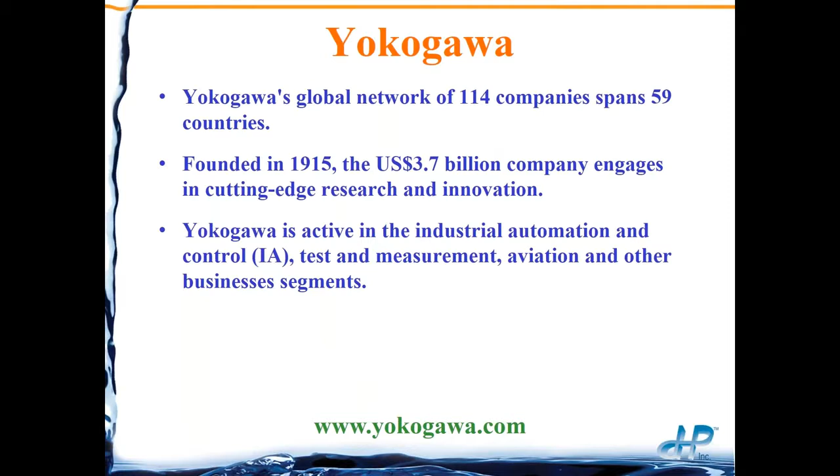Most of you know about Yokogawa, a huge company all over the world, does many more things than you and I probably know about. We may know more about the instruments, but they have all kinds of different business segments, basically in just about every industry that you can name.

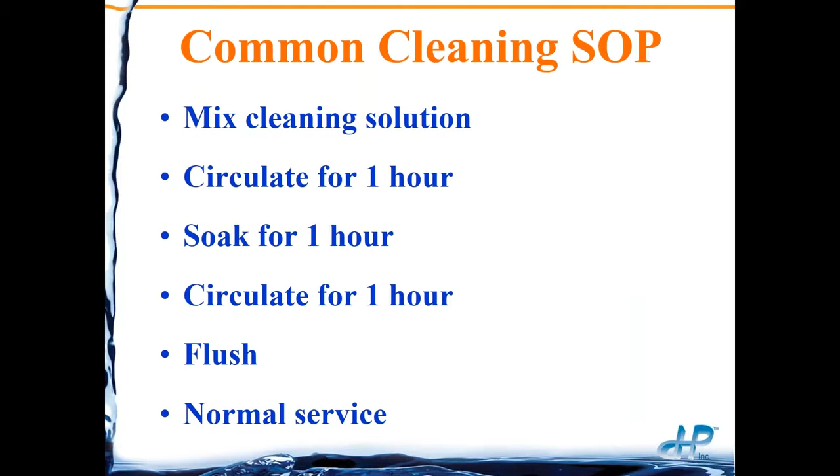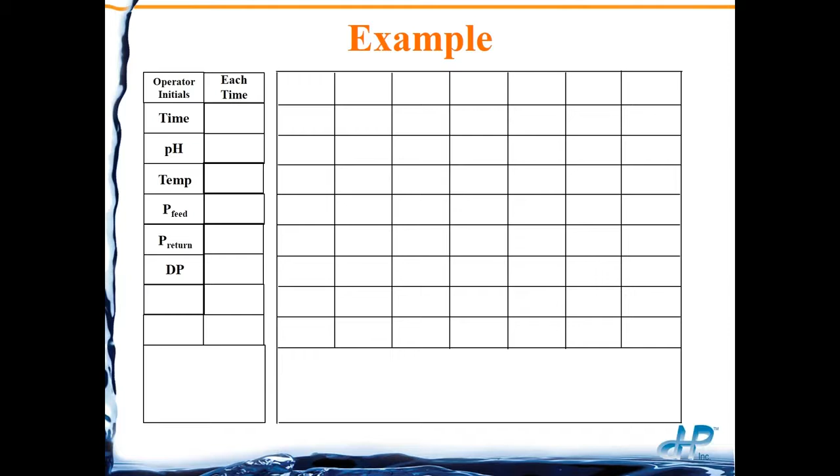So that's a cleaning. Some of you do, some of you don't, but we recommend that you monitor the cleanings. There are certain things that are very important to monitor—we won't get into the details of that. There's also a column that shows the guardrails: don't go below this or above this pressure or temperature.

We recommend every 15 to 30 minutes you're taking data and making notes as needed. That way you can really monitor and see what's going on.

So let's say that we did this cleaning and we're tracking normalized permeate flow, which we should be. We cleaned when the normalized permeate flow dropped 10 to 15%, but after the cleaning we only gained back about 50%. We didn't go back to new or near new performance. So why? Well, we could do some troubleshooting.

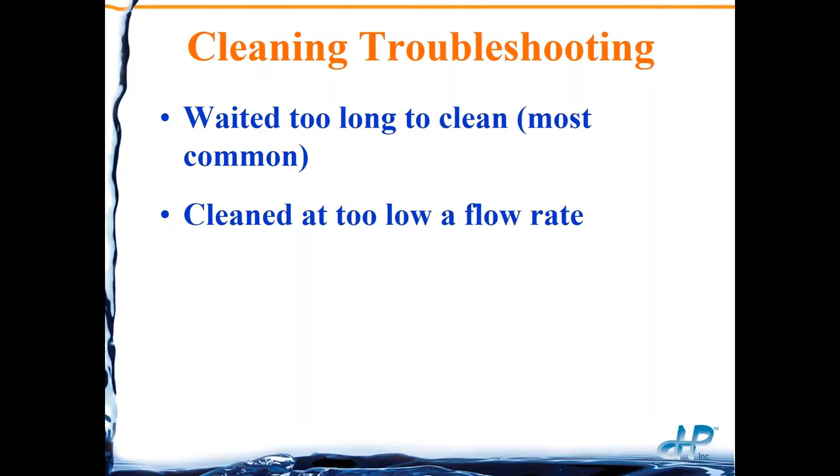Some things that can happen: we waited too long to clean—we won't talk any more about that, we're only going to talk about pH at this point—cleaned at too low a flow rate, too low a temperature, didn't clean long enough, didn't replenish cleaning chemical, and that's really what we're talking about here.

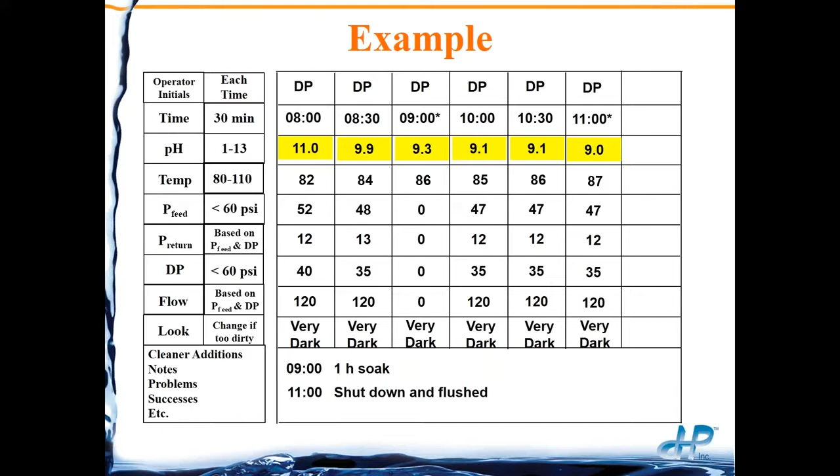So if we look at the data for this cleaning, we started out at a pH of 11, and by the end of the cleaning, 3 hours later, we're at a pH of 9, and we didn't add any chemical to it. So remember from 2 webinars ago that pH is logarithmic.

So if we started out with a pH of 11, we'd call that our new solution, our 100% strength. What's the strength of the cleaning solution when we hit a pH of 10? Well, again, it's logarithmic, so we only have 10% of our cleaning solution left. And if we wait until it hits a pH of 9, what strength do we have? Only 1%. So this is an example of using pH for troubleshooting.

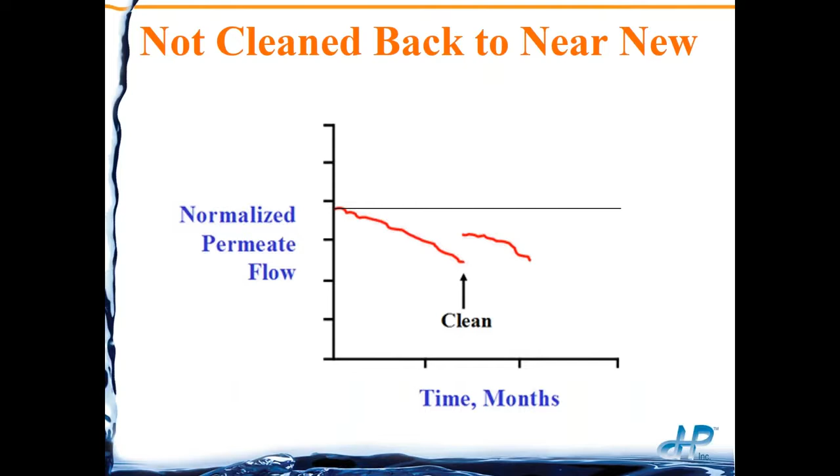We should have added more cleaner. And that might be the reason, or at least one of the reasons, why we didn't clean this back to new performance. And then finally, just a quick one on ORP troubleshooting.

ORP measures whether a water stream is reducing or oxidizing. The last webinar that we gave a couple weeks ago will give you a good basic understanding of ORP if you didn't get to see that.

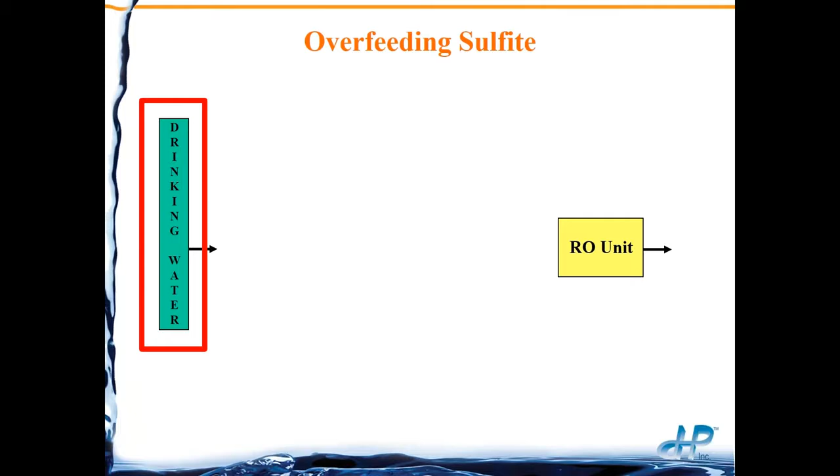Well, one problem that's fairly common is that many industrial RO units operate on drinking water, and drinking water is chlorinated. Polyamide thin film composite membranes can't take chlorine, so we either use activated carbon, ultraviolet irradiation, or sulfite injection in order to remove the chlorine before it goes to the RO unit.

If you're using sulfite, that's where an on-stream ORP meter makes sense. You can have a feedback loop that tells your sulfite injection pump how much to pump, and you can also have an alarm and a shutdown feature so that if the ORP goes too high, you can shut down the RO unit.

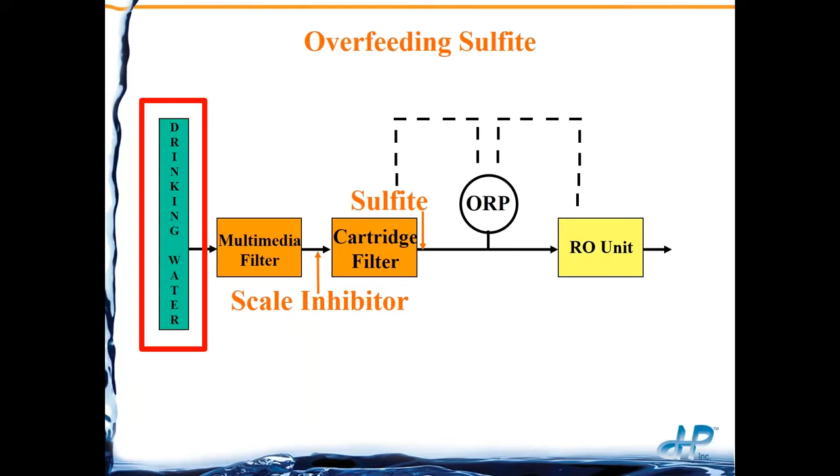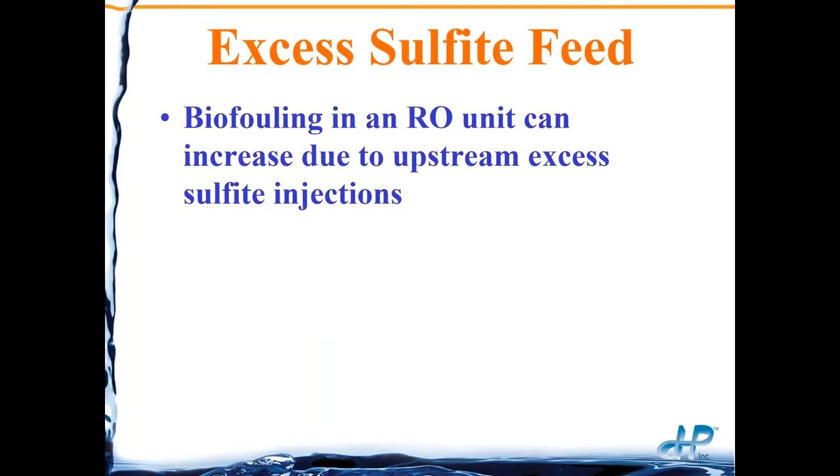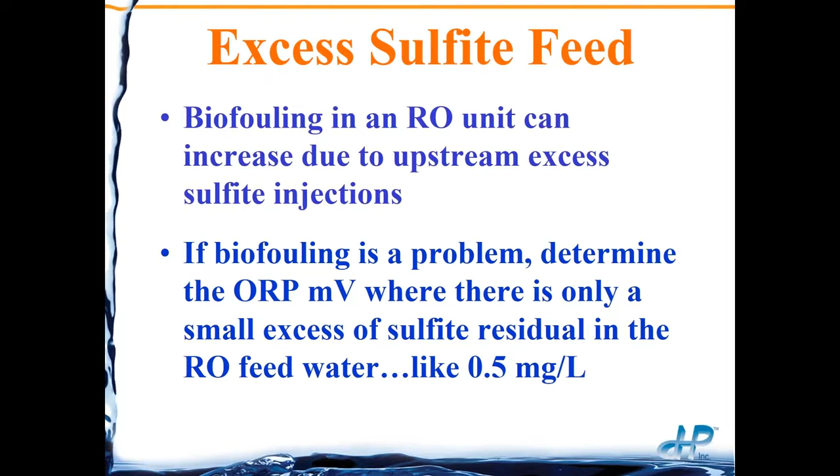Well, if you overfeed sulfite, you can end up with increased biofouling in the RO unit. So we really want to minimize the amount of sulfite that's injected. If you can get an excess of maybe just 0.5 milligram per liter, no more than 1 milligram per liter, that's probably going to minimize the biofouling in the RO unit.

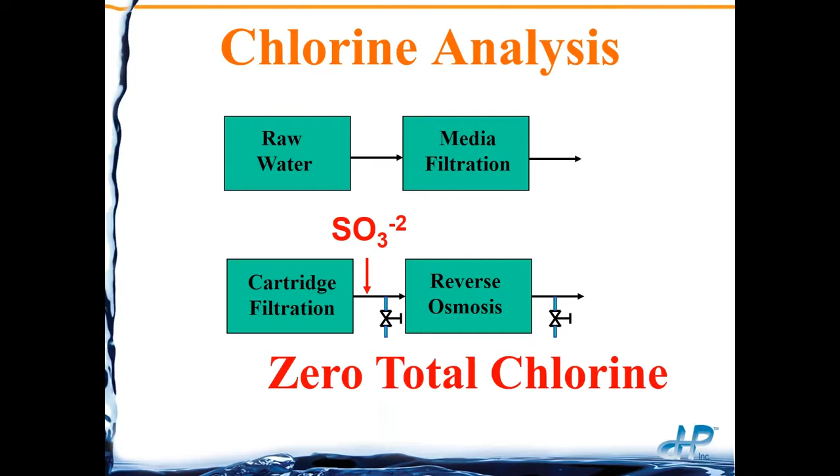So again, as far as using ORP as a troubleshooting tool, we want to make sure that the sulfite injected gives us a 0 total chlorine, but we also want a minimal sulfite overfeed. All right, so that's an introduction.

Now let's move on to the bulk of the presentation and turn this over to Cherlyn.

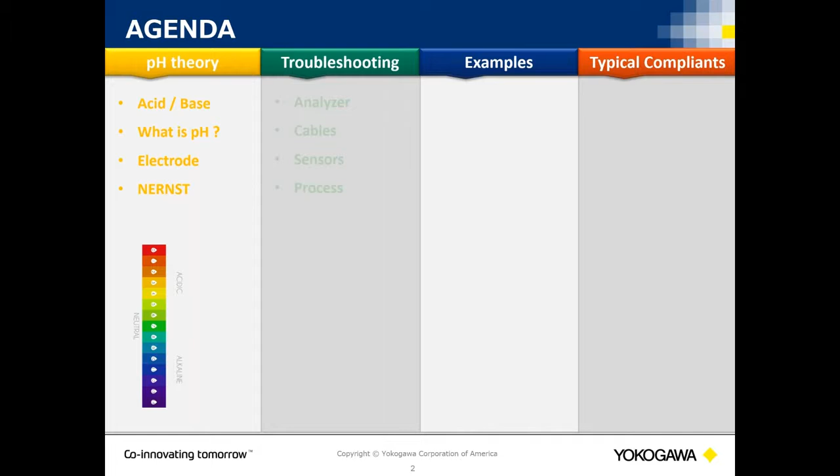Then the bulk of what we're going to cover is when we go to a site location, or I'm on the phone with you and you call and say your stuff's not working, you're seeing inaccurate readings, what's going on -- these are the steps that I'm going to do with you or at the site location. So our best practice of what to walk through.

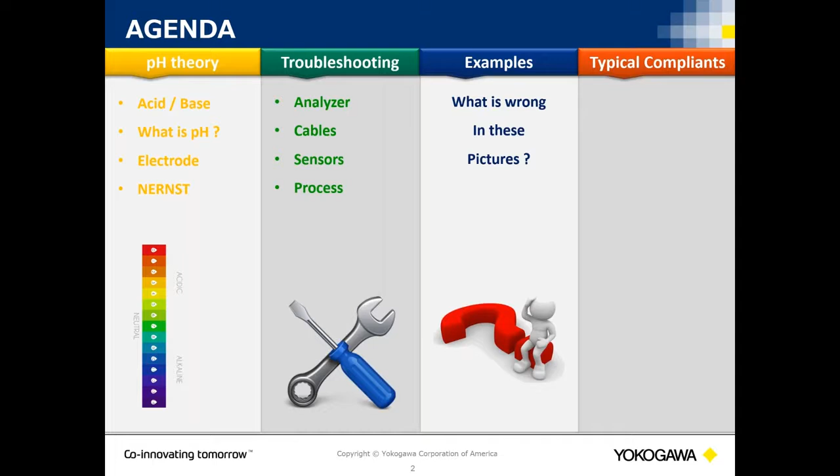And then some real life pictures that I've seen with installations and what could be wrong, just to bring light to some things that you may see out in the field with yourself already. And then go over some typical complaints or commons, or what could be causing them, okay? So that's the bulk of what we're going to do.

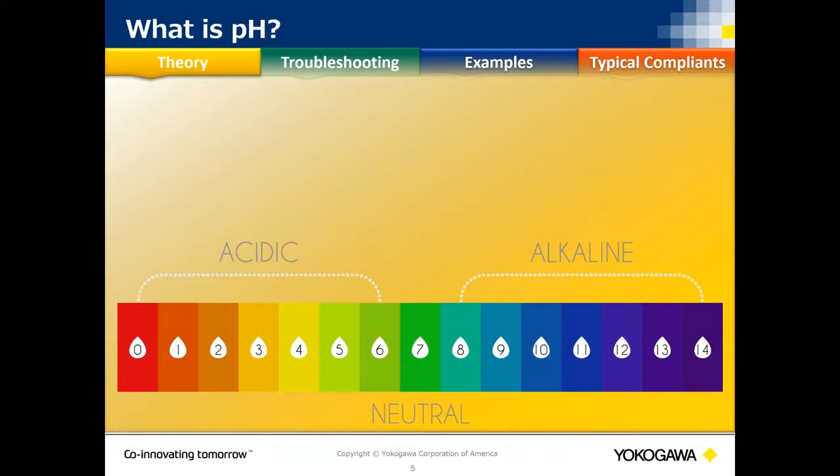Theory. All I want you to get out of this is we have the pH scale. We know it goes from 0 to 14. 7 is the neutral point, which means it's 0 millivolts. Anything below that is acidic, anything above is alkaline. The biggest thing we talked about and highlighted is the effect of temperature.

Remember, temperature is important to your pH readings for two reasons. There are two different types of temperature compensation. There's the effect on the glass electrode, where as temperature increases, that glass will expand and contract, which shortens the life of your system. But there's also one called a process temperature coefficient, meaning outside of the glass changing, the pH of the sample actually changes with temperature.

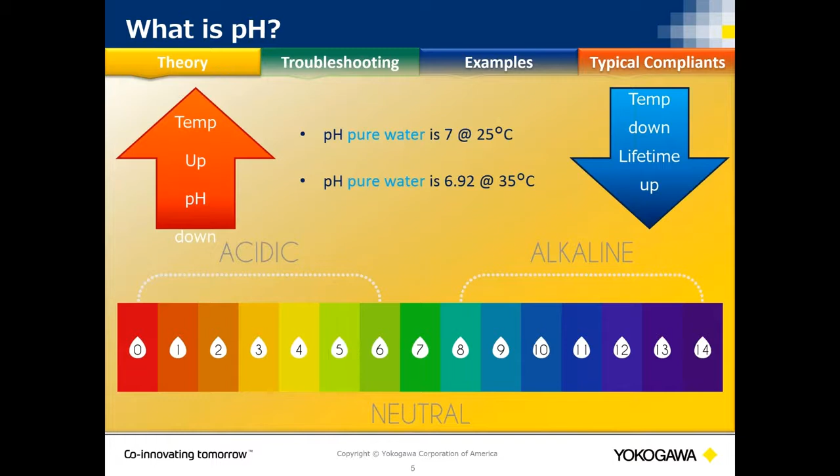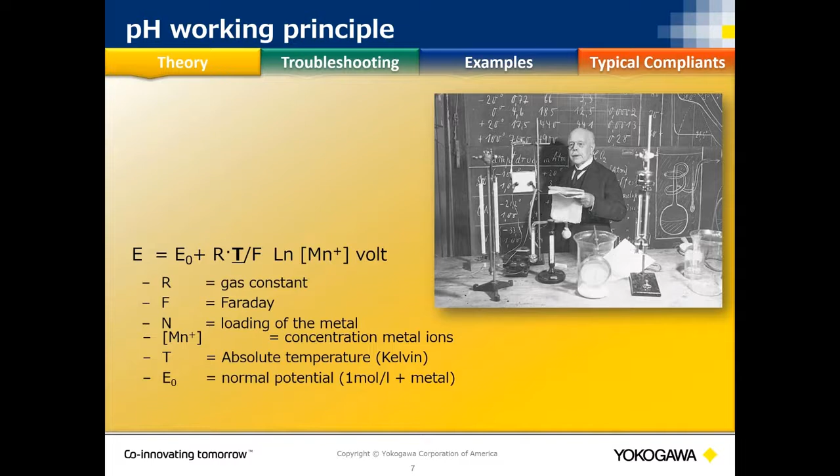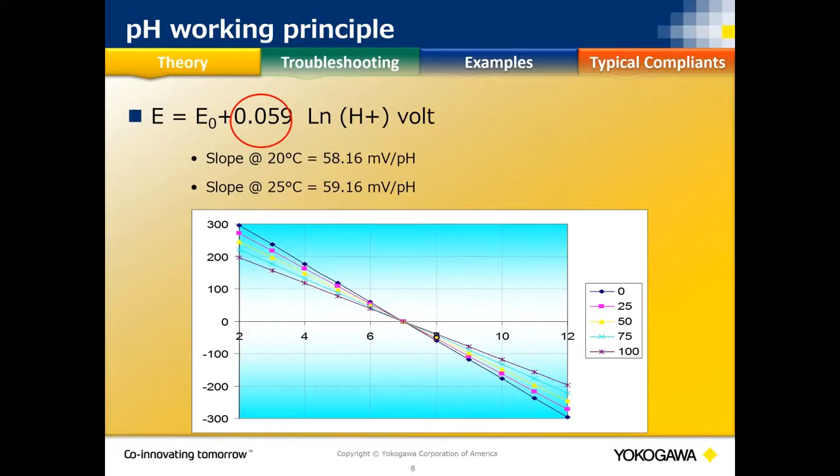The reason we need to pay attention to temperature is because the Nernst equation has temperature right in it. So any effect of temperature is largely impacting your actual pH measurement, okay? Out of this Nernst equation, the magic number we want you to get, this 59.16 millivolts, is what we want to stick in your head. At 25 degrees C, 59.16 millivolts is equivalent to one full pH shift. This is important because when we look at calibration data in the analyzer, we're correlating that value with what our instrument is offsetting or compensating back for. That's all we want you to get out of that theory.

So the other thing about temperature, remember I mentioned Nernst compensation. A perfect slope pH glass electrode responds so that one pH change is equivalent to 59.16 millivolts. Because of the way the glass is made, it actually will change with temperature. So the Nernst, or automatic temperature compensation, also called Nernst compensation, changes and accounts for this. At higher or lower temperatures, that 59.16 millivolts is slightly different, okay. That's what we just want you to remember out of the theory of pH.

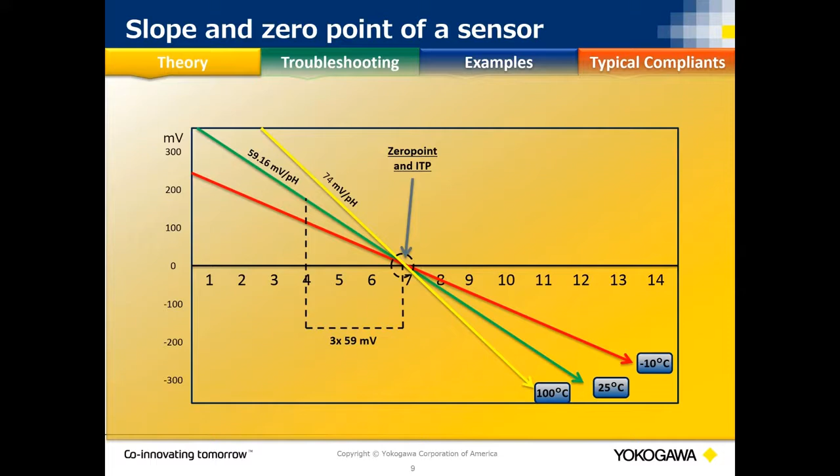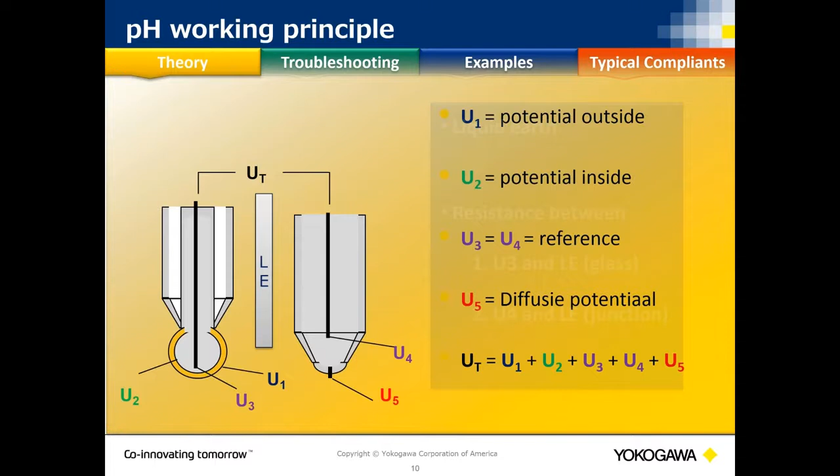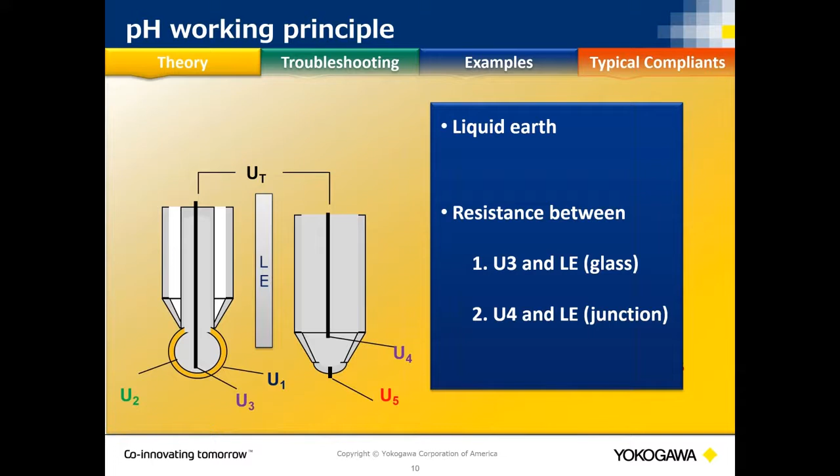You insert a solution ground electrode into your probe. That's what its purpose is. Then you can isolate and know, is what's going on affecting my glass for my process, or is it affecting my reference electrode? So that's one of the purposes of the solution ground rod, to differentiate where I'm having problems, or which side of my probe my process is actually affecting.

One thing I hate about most, to be honest, about pH is ground loop. Has anybody ever experienced ground loop problems in their plant? If we don't make sure that the analyzer, the pipe, and the probe are all on the same liquid earth ground, the whole grounding, noise will travel up through our probe, into the reference electrode, and into the analyzer. It will shorten the life of our probe and cause noisy and inaccurate readings.

So we need to make sure, and that's the other purpose of that solution ground rod, that your sensors are on the same ground as your analyzer. We just need to make sure that our analyzer and that entire loop are on the same grounding as our process pipe. This, I think, is one of the biggest headaches to solve, especially if you're in Florida, where I see it most commonly—ground loop currents. That's the biggest headache with that aspect of it.

And that's, from my knowledge and understanding, really the stopping point of where we go. You can simulate this in your analyzer on the terminal strip. There's going to be a solution ground terminal and a reference terminal. If you use a paper clip or a wire to jumper those two together, and your reading locks on and is no longer noisy, that's a good indication that you have improper grounding in your entire system. So that's one little test you can run.

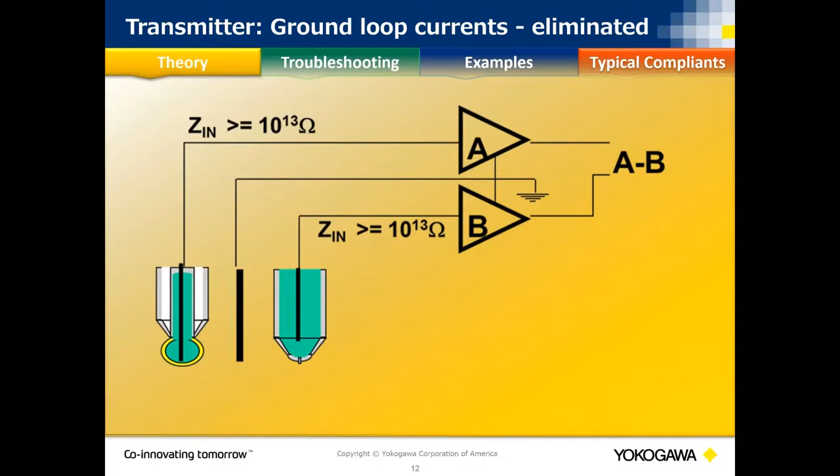Obviously, if you don't want to do that, you can easily just take a grab sample, take your sensor offline, and put it in a bucket. If your system goes stable, and then you put it back online and your pH or ORP measurement starts to drift again, that's another indication of grounding. So those are ways for you to figure out if grounding is causing errors in your pH reading.

So the bulk of where we're going to spend today: these are our steps on what we feel is the best process when you check your analyzer if you're having problems. The first thing we're going to do is check the data in the analyzer itself.

Remember, the photos that I have are just my instrument photos. For copyright issues, I can't use other people's equipment.

After I look at what's inside my analyzer when I walk up to it, I'm going to try and simulate on the analyzer a pH 7 and a pH 4. This way it tells me if my analyzer is working or if I need to migrate and look at the sensor as the problem.

And then if none of that works, I'm going to short these terminal numbers - your reference pin in your analyzer, your pH measuring glass in the analyzer, and your solution ground. All of those should lock in on a reading of 7. If they don't lock in on 7, if it's like 3, 4, whatever in your analyzer, then it's a good indication that your analyzer is actually what's causing your failures and what needs to be replaced.

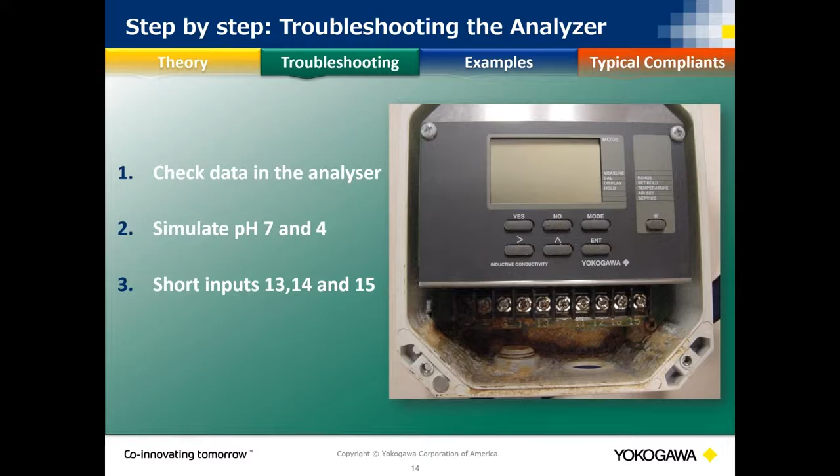So right now I'm going to go into a little bit more detail on these 3 components, okay? We've got some videos for you.

So first, when you arrive at an analyzer, I want you to take a look and see what you have. And when you call me, I'm going to ask you for some data - the last time you did a calibration, what was that zero offset or your asymmetry potential, or what are common terms?

What's that millivolt? When you did your 2-point calibration and stuck it in your 7 pH, how far off from 7 pH did your pH probe say it was? Remember, this example shows 11 millivolts.

That Nernst value is 59.16 millivolts, remember? So at 11, not so bad - it's about a quarter of a pH that we're compensating back in. But if we get to be about 30 to 35 millivolts, we're saying that instead of a pH of 7, my sensor is reading a 6.5 or a 7.5, depending on if it's a plus or a minus in that millivolt reading. So that's the purpose of that Nernst value of 59.16 in the theory that we want to take back to.

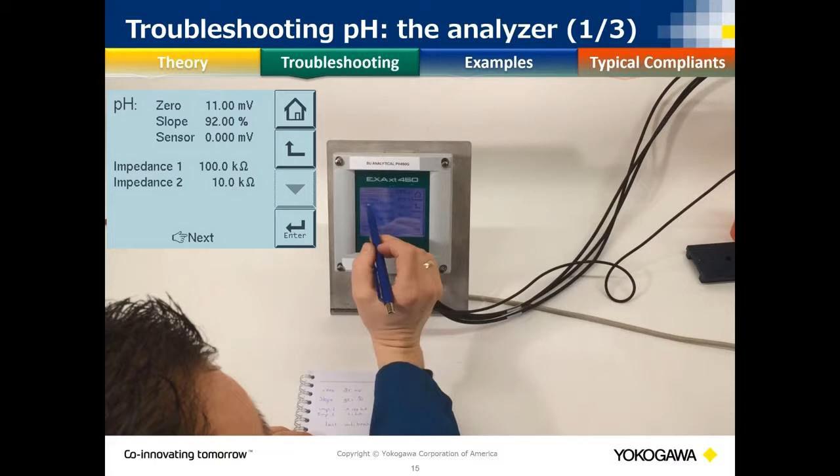Okay, the next value is going to be the slope. Some instruments give it in percentages - ours gives it in percentages. Others do give it in millivolts as well, but it's the same thing. That 59.16 is 100% slope. So this one is a 92% on this screenshot that we did here. That's pretty good, that's not bad.

But if we go below that, if it's about 85%, then we are going to look at saying, okay, well, I'm also having slow to read, so we need to look at - probably fouling on the glass electrode is probably causing the issues.

Two other values that you get in your instrument are what we call reference impedances, 1 and 2. One of these is our impedance on your glass electrode, one of them is the impedance on the reference electrode. So those values are not in everybody's analyzers, but we can read these values as well and figure out live time what's going on with the system.

Other information that I'm probably going to ask you for that are in analyzers today: when was the last time that it was calibrated previously - go 2, 3 back and show me that degradation. Give me those results out of the logbook, whether it's in the analyzer that you pull or your paper that you send, so I can see how quickly it degraded and how quickly in between that calibration, because interpreting that data will help analyze how quickly the pH glass is being attacked or the reference electrode is being poisoned.

And then the other thing that we're going to look at is that temperature compensation. The top temperature compensation is normally what everybody calls just that ATC - the Nernst, that's set to automatic and goes back to 25C. But we're also going to look at and make sure that you don't have programmed in there a process temperature coefficient.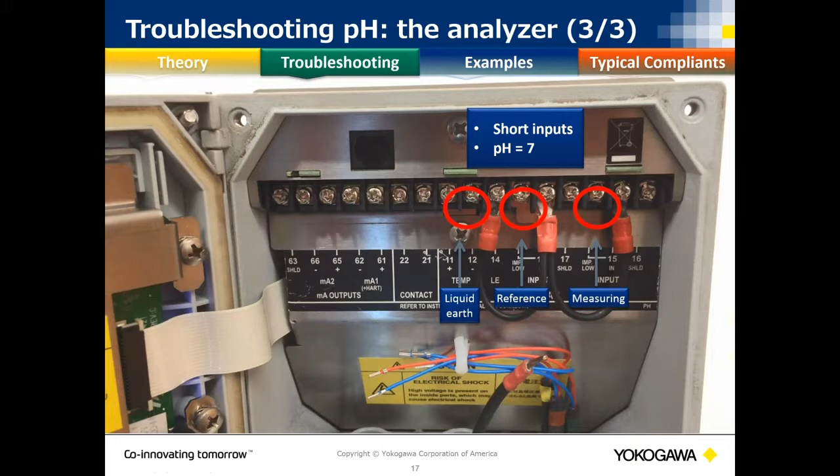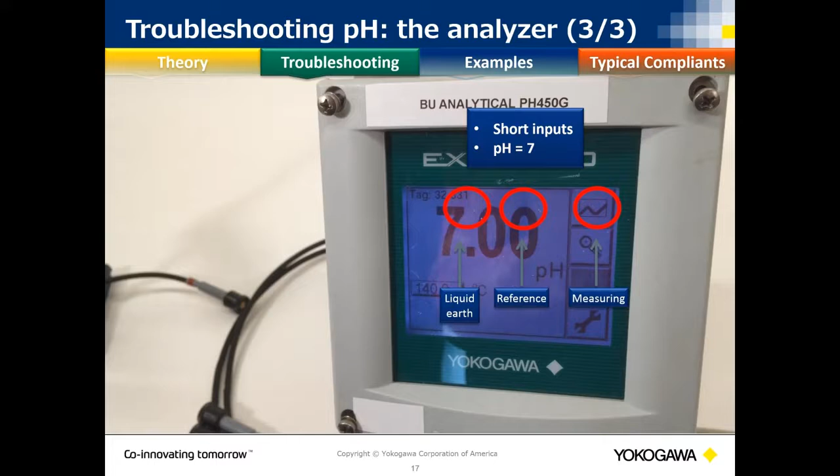Then the third one, on our terminals, you're going to short the reference, your measuring, and your liquid earth, and they should equal out to be about plus or minus 7 pH. This is because when you short all those out, it should be a 0 millivolt reading, so the display should read 7 pH. If for some reason the display does not read 7 pH, it could read slightly like 6.8 or 7.2, because if you did your last calibration and you have that 0 offset, that millivolt value - and I didn't realize I left the images there, sorry, in that video - but it'll be that 11 millivolt offset will slightly change the reading a little bit. So it may not be right at 7, it'll be close to 7.

The next thing we're going to look at is the cables and the liquid earth. Sometimes this is the last thing that we look at. We normally just say the probe isn't working, I calibrated it, I cleaned it, doesn't work, I tossed it. We've got to look at the connectors itself. So we need to look and make sure that they are actually dry, that they are wired correctly. If they're wired incorrectly, then it could cause issues. Our stuff has color coding that can get confused sometimes. I know a couple other people's have similar systems, so we'll just show you that.

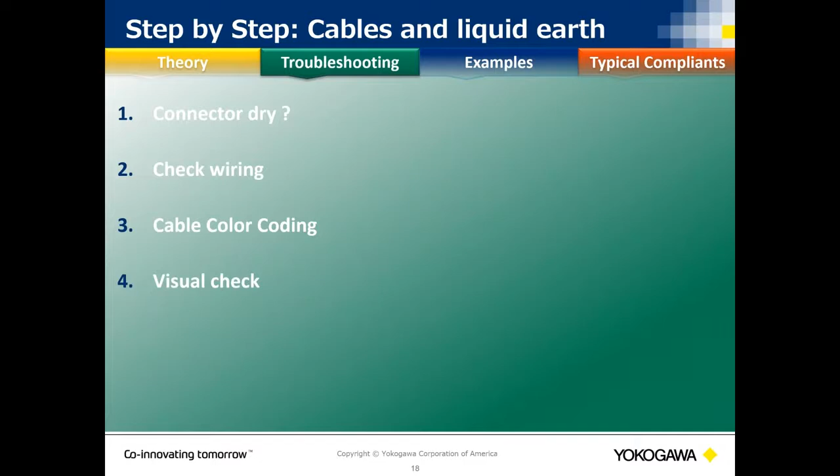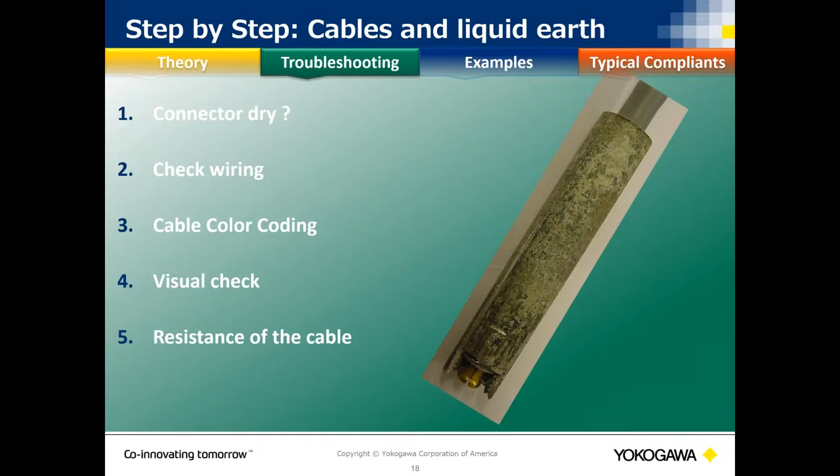And then visualization checked, and then also check the resistance of the cable. Sometimes if the connector is not dry, water will basically corrode it and it'll finally seep up into the analyzer and it could short out your analyzer. But we just need to make sure that they're dry, and sometimes we don't see this until we physically take the equipment out of process and hardline.

So simple things - how do we know that our instruments are wired correctly? Obviously, most cables today are color-coded, and in the instruction manuals, whether you have paper or online, they'll tell you which color goes to which terminal. There's online applications that help you figure out wiring as well. So a whole bunch of access, but basically we just need to get down to, is it wired correctly?

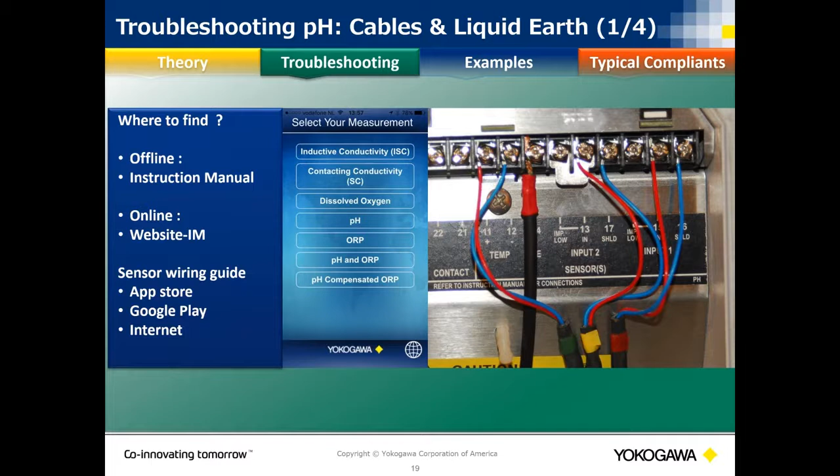Especially when we're trying to mix analyzers and sensors with competitors, it's easy to get it wrong, but we just have to look at the documentation and make sure that we matched it up correctly, because my terminal 13 may not serve the same purpose as someone else's terminal 13. So if you just look at my sensor wiring manual and it says this is 13, but it's my reference and someone else's solution ground, we're going to get errors in our readings. So we just need to make sure that we match up the true raw reference, pH, solutions, shields, temperatures to the right terminals - that color code.

This is where it kind of gets a little confusing. There's an example here where you have those individual 12 millimeter connectors with individual 2-wire cables, and they mean certain colors. The purpose of that is when you have a sensor 10, 15 meters away, so 30, maybe 50 feet away at any given time, you know that when you connect this sensor to this cable, it goes all the way through your conduit wires and is terminated at the right terminals in your analyzer. Here's an example where this can be wrong.

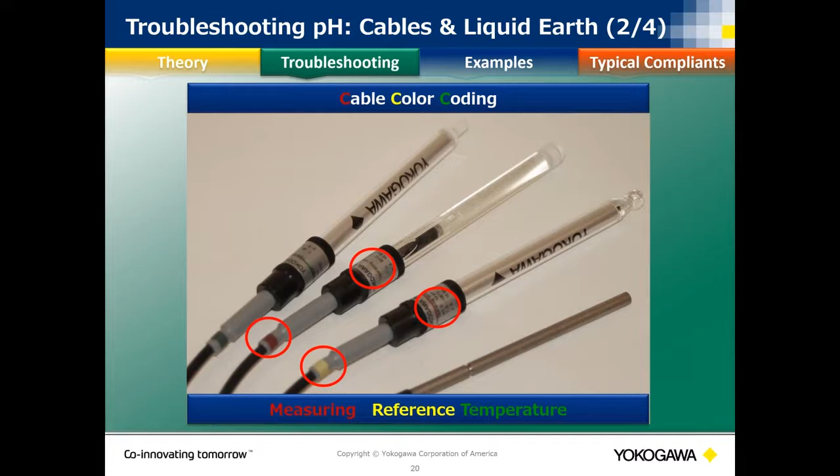Most of the time you'll see a red on a cable and a yellow on a sensor. For here, the image, I just showed you how they could be easily swapped. If you don't match up the red to the red and the yellow to the yellow, that color coding, then you'll get inaccurate readings in your analyzer display. So we just wanted to show that to you guys as well.

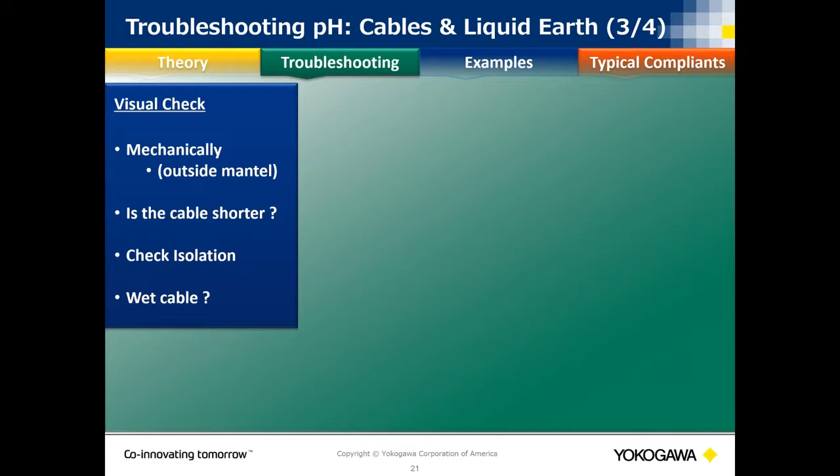So visual check of your sensors itself. We need to look, this is where it gets fun, for actual mechanical damage. We need to see if the actual outside mantle could have been broken. Sometimes when we pull these cables through conduit and it gets stuck and then we just pull it and knock it loose, we don't actually know that we've damaged it, unfortunately, until we rerun that 30 feet of cable all over again. It is a headache, but if we get down to the sensor's not working and we've replaced the sensor and it's still not working, we're going to have to pull that cable out and make sure that we didn't nick it when we pulled it through the conduit.

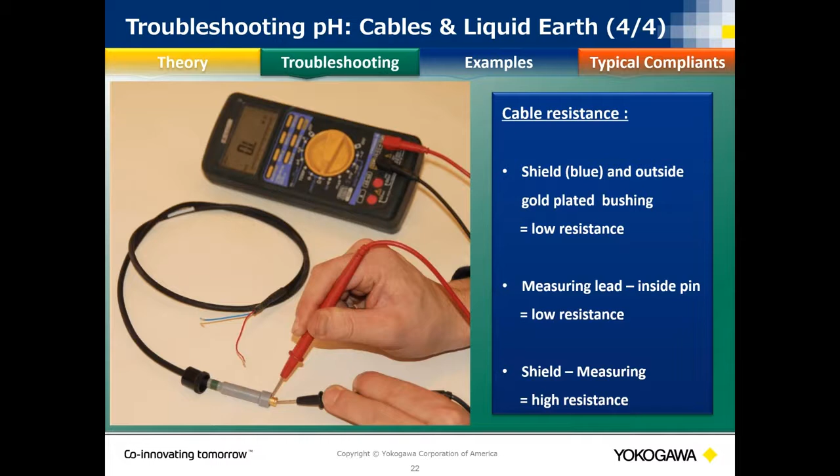So this is one good thing to look at if we don't want to rerun it, if we're in a room and don't want to run it through the conduit, but we have quick access on the panel to the terminal or the sensor connection and the analyzer box, so you can easily measure right there. It's one quick way to see if your cable was damaged when you ran it through the conduit and stuff.

Here's another thing we need to look at: inspection of the sensors themselves. Sometimes you'll get slow response, and we need to look at what happened to the process, because a lot of times we hear, these were working just fine and now it's not working, the cable's fine, I changed the cable, I changed the sensor. But then when we go to change the sensor, that's when we see the visible damage to the probe. So if we start seeing slow response, we need to pull it and see if it's coating or if it's broken and having issues.

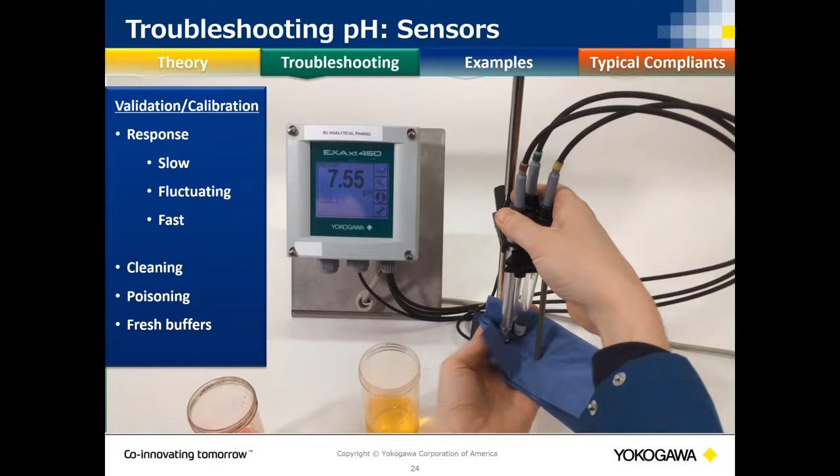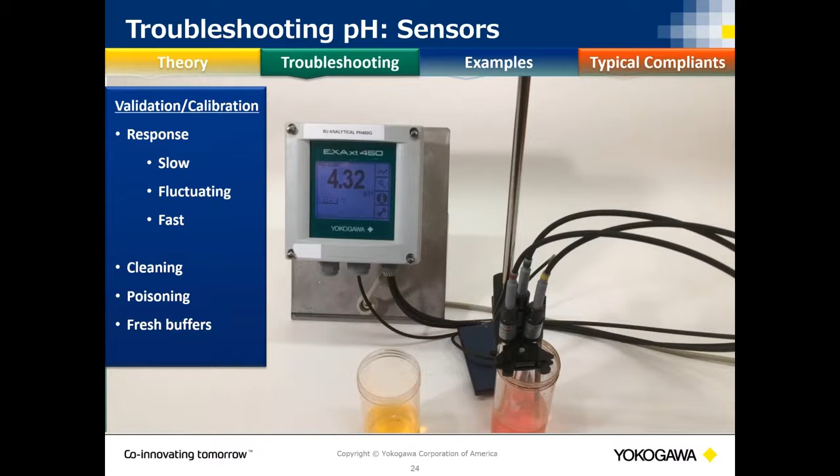This is what I mean by how fast it responds to a process change. Physically, how fast does it actually respond when you go from a buffer solution of say 7 to 4 on your grab sample? Is it pretty quick or is it slow? Is it bouncing around? If it's quick and stable, there's probably nothing you need to do. But if it's slow and fluctuating, we need to look at cleaning. If it's clean, it's probably poisoning the reference, and that's what we need to look at. So be cautious when doing these quick tests, and make sure you're using fresh buffers all the time.

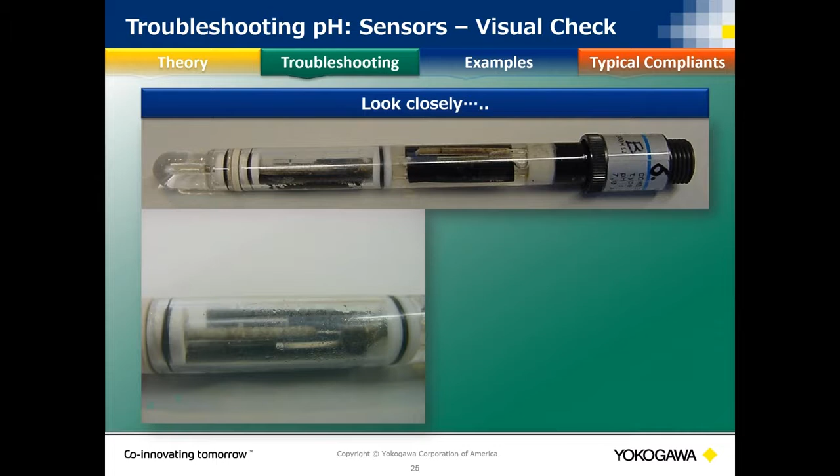Here's another visual check, one where you'll get inaccurate pH readings but won't see it until you take the probe out of the process. Do you see the top left-hand side of this sensor? It should have an internal KCl solution. Remember, you have a reference silver chloride pen immersed in KCl. In this particular example, there's no fill solution whatsoever, it's actually completely empty. So there's no continuity between your pH glass in the process and your actual reference pen. So that's a visual check. We'll see reading errors, but we won't know until we take the probe out of the process.

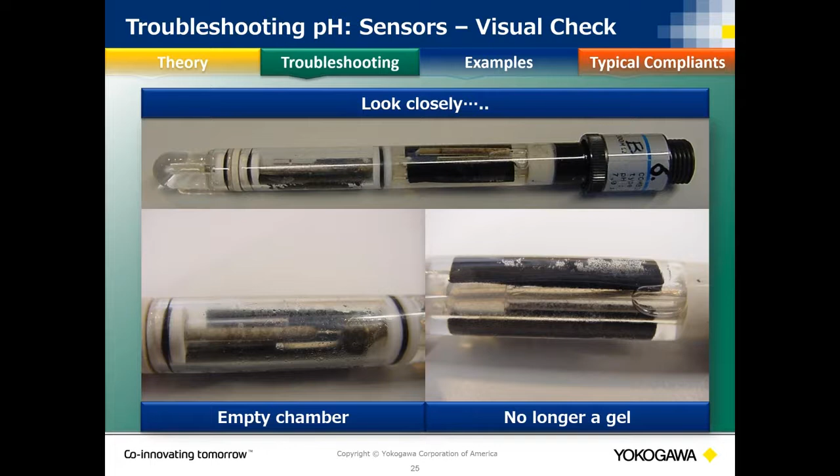Another thing we can see here, remember there are different types of internal KCl solution: liquid, gelled, 1 molar, 3 molar, saturated. This particular sensor is supposed to be a gelled fill solution, but when we pulled it out, it's not just gelled inside, it's actually liquid, you can see that air bubble in there. That shouldn't be there, it should be a gelled solution. This indicates two things: higher temperatures and also process attack. If there's a slight crack in the glass and acid in your sample gets into that KCl, it can actually change it from gelled to liquid form. When that happens, you get errors in your reading, you get drifting, and then you have to recalibrate those errors out. So pay attention, if you have a gelled KCl probe, make sure it is still gelled.

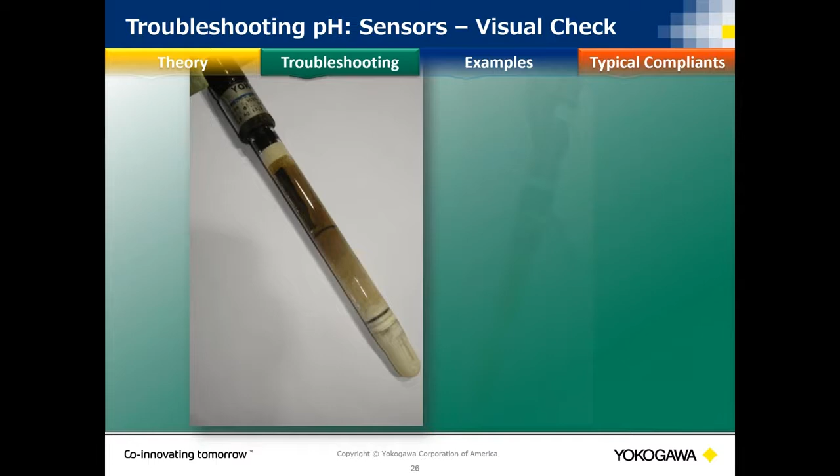Another thing we see a lot, for anyone with high temperature applications: sometimes what can happen to the KCl solution is an effect called caramelization. The higher temperatures physically change the white crystals brown. It doesn't necessarily mean the pH probe isn't working right now, it means it's on its way to stop working. So if you see a brown electrode, it's not always bad. If it calibrates and it's operating, it's fine, you just need to prepare to replace it shortly, because it will fail soon.

However, the picture on the right-hand side is a different type of caramelization, or brown KCl solution. This was actually caused by process ingress, where the process attacked the KCl solution, reacted, and changed it brown. So you'll see two different effects in your reading: one won't work at all, but the other will actually still work, it'll just be drifting, off a little bit. You'll notice it when you do those one-point process calibrations against the lab.

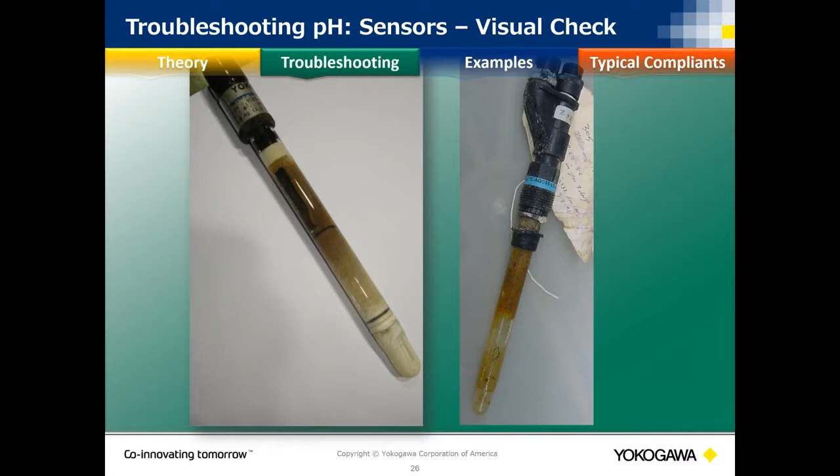The biggest thing that's going to be the hardest for you to see when visual checking is hairline cracks. Remember, these are glass, they are sensitive. I've done it multiple times where I haven't paid attention, turned around and hit the pH sensor on something and just shattered the bulb.

But then there's other times where you can tap it and go to put it in your pH 7 buffer, it reads 7. You put it in your 4, it reads 7. You put it in your 10, it reads 7. You put it in your sample, that should be 9, it reads 7.

So a good indication, if you put it in a sample and it always reads 7, then you've got a hairline crack in the glass, and you may not actually be able to see it unless you're in perfect lighting at the right angle and it's clean, with no process cover up on it. Think of it if you're in a scrubber tower with low lighting and you just took it out of that slurry mixture, wiped it off with a rag, and try to tilt your glass electrode to see a hairline crack. This is one you may not be able to see, but remember, if you read 7 no matter what, your sensor is most likely cracked.

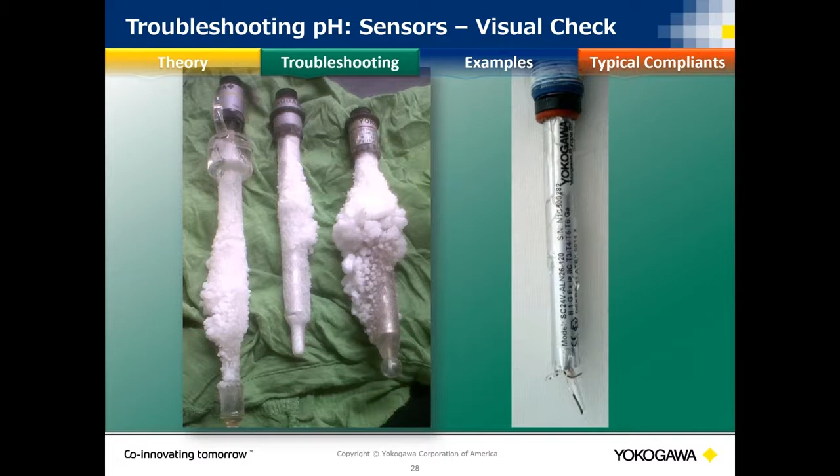So leave those alarms on if you can, so you can get an indication of when your sensor's cracked or when it's starting to foul that junction, okay?

My favorite one, another thing with gel electrodes: they're kind of a pain, but manufacturers' boxes have arrows with recommendations for storage, because you guys should all have one pH probe for your most critical processes sitting on your shelf in your plant that you can pull when your process sample goes down.

Gels are notorious for this. Remember, gel expands and contracts with pressure and temperature. So when they fill the glass electrodes up, you have to leave a little bit of an air bubble in there so the gel has someplace to go.

Otherwise, if there's not a little air capacity in there and it expands, it'll shatter from the inside out. So when you store these either on the side, like in these pictures, or with the bulb pointing all the way up to the sky, that gel is going to migrate towards the center of the earth, towards gravity, and that air bubble is going to come down.

So a lot of times you get complaints where there's nothing in this solution, I just got it out of the box. And what we have to ask is, how did you store it? You have two options: A, just let it sit with the bulb pointing towards the center of the earth for 24 hours to let it migrate, or you can actually hold the glass electrode and shake it, shaking the gel that's migrated up back into the bottom of the probe.

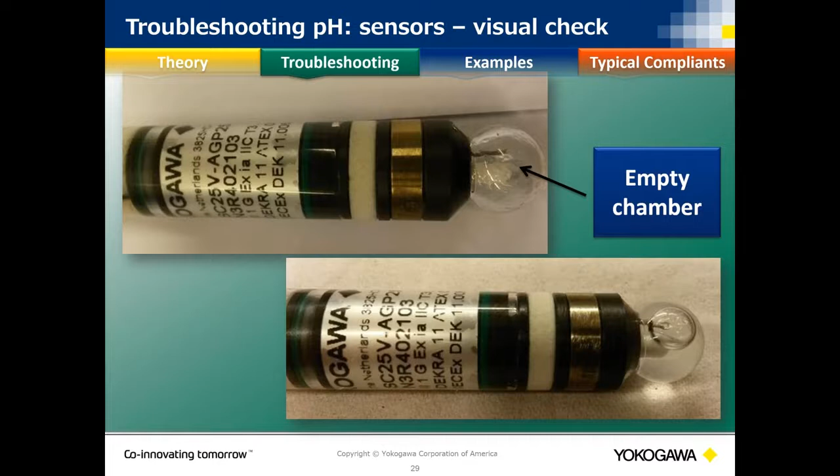Obviously, I've done this before. I've shook it and actually didn't have a good grip, and the probe went flying. So just be careful that you aren't sitting next to a desk where you can hit it on a desk or a railing.

And B, you don't lose the electrode while you're shaking it. Okay. One thing that's like the last thing people think to check: your system has a temperature electrode, and remember, temperature is in the pH calculation. So if your temperature portion of your probe is not working, you're going to get errors in your pH measurement.

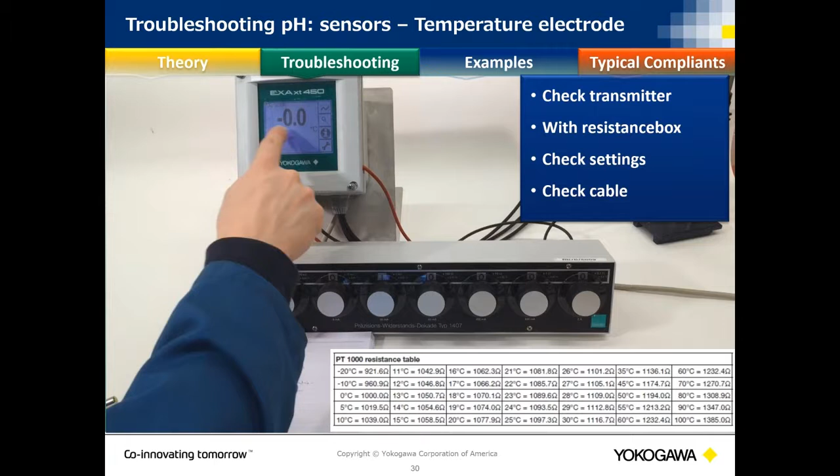So a lot of places have resistance boxes, and there's chart values out there that say this much ohm resistance is equal to this much temperature reading. So it's a good indication for you just to check to make sure that the temperature element in your system is working correctly, reading correctly.

We basically say that if it's within 0.3 degrees difference, then it's okay. Outside of that, nope, we need to look at replacing that temperature electrode. And that is pretty much the last portion of what normal people go to check. Normally it's the cable that goes, or the sensor's bad itself.

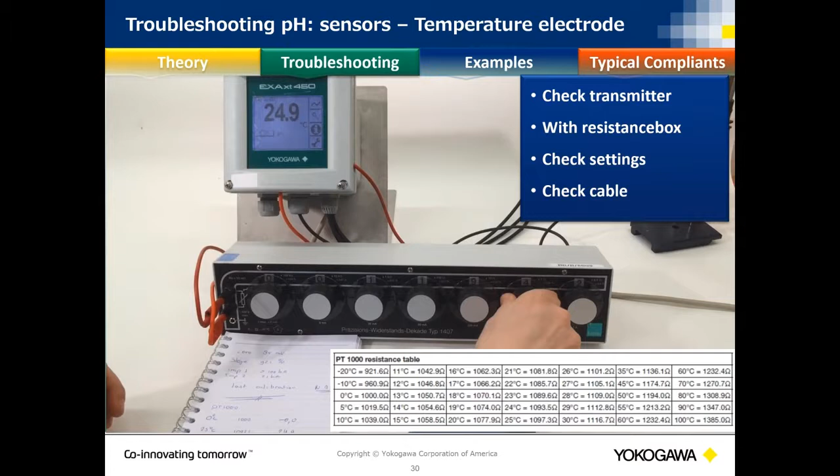All right, so I'm right at the 30-minute mark, so we're now going to go into... we've troubleshot the instruments, they work correctly, the probe is correct. We also need to troubleshoot the process, because sometimes we need to make sure that A, it's installed correctly, B, the equipment used is the right equipment for the application, and C, it's even within the process specifications of the process.

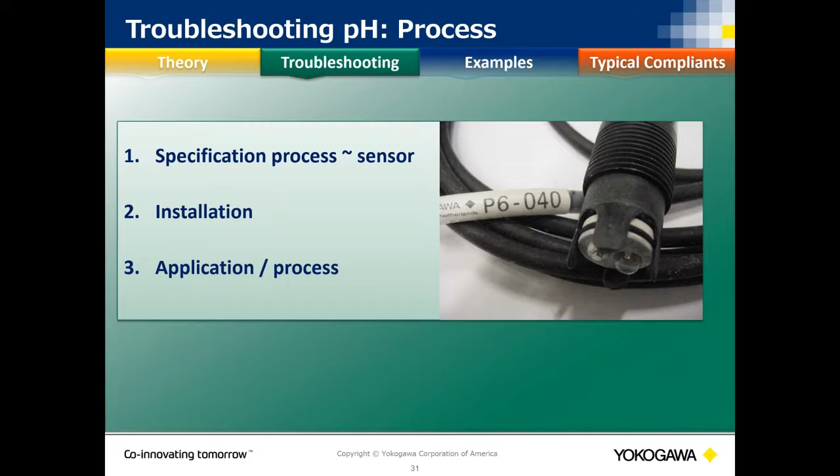This picture here I show you is one where I know what my equipment looks like. That junction, that black, white, black, white, that back white and that black band should be up inside that black body. So this is one where the process pressure actually pushed out the junction from the electrode, and then the process was able to ingress into the back side of that, into the sensor, and it damaged the sensor. So this is one where the specification was not right for the equipment being used.

So here's some things that we look at: we're going to look at the basic pressure, temperature, pH range, and process composition. You know, we're going to look for if there's HF, or if there's sodium hydroxide, if there's sulfides in there. HF obviously is really aggressive, especially when you get with the higher temperatures.

It'll eat the glass. Doesn't matter whose electrode, it eats the glass. So we need to make sure that we don't have just a general purpose one; remember, we're going to put something that has a thicker glass membrane on there. Same thing with sodium hydroxide, so we get a longer life.

If we have a lot of sulfides in our process, they can actually react with the silver chloride reference pin and form a solid. So we want to make sure if we've got a process with high sulfides that we actually use something like a flowing junction that keeps the process from getting into that junction and possibly into the reference system to attack it. So either that, or something with a KCl reservoir. Remember, you can put the process in a KCl tank, or the reference electrode in a KCl tank, so the process has to get all the way through into that tank and attack all the KCl before it gets to the probe. So there's things that we need to look at there.

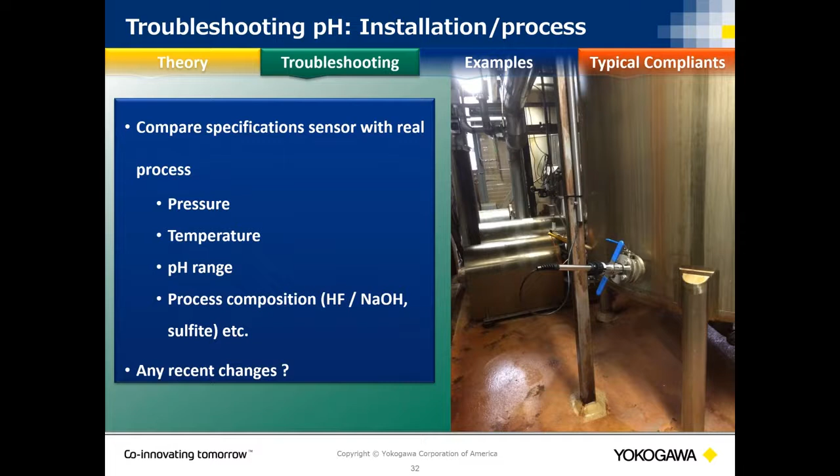The last thing that we're going to need to look at is any recent changes. These may be minor changes to you, but they can really affect the life of your probe. Take an example like a CIP application: you were cleaning for 30 minutes at 130 C, you simply just changed it to 10 minutes at 140. But we didn't look to make sure that the sensor we're using can hold up to that. And now it lasts about a week. So little changes, and if we don't have the right instruments in the process, can affect in the long, big scheme of things.

When we look at the installation, we're going to check whether it's before or after dosing. Make sure it's not in a pipe where there could be no flow, or what we call dead leg—not physically in a solution. If your pH reading is noisy or moving, it could be because it's not in solution, or because you're near an air bubble where the flow is forming air bubbles that can affect your pH readings.

For flow, we generally say about 6 meters per second is good. However, if you're in a low ionic solution, you need to make sure it's lower than that, because you need continuity—there are no ions in pure water, so you need really low flow. And again, make sure we've got the right glass composition for the process.

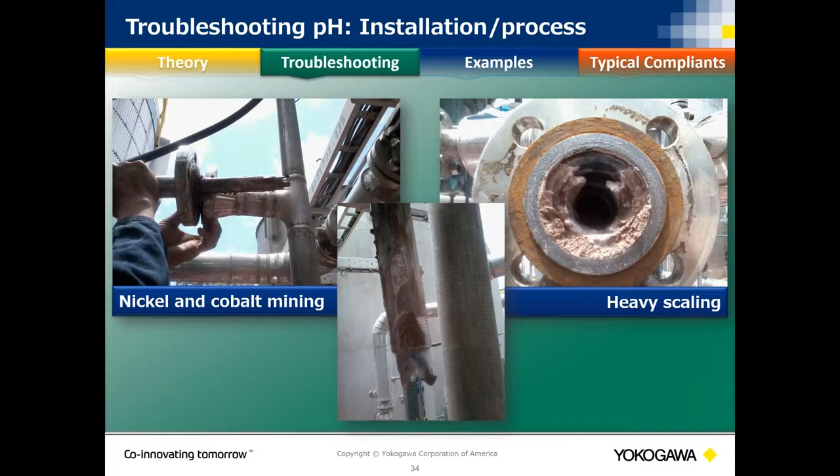Here's one to look at from a nickel application. This is an example from a mining site where they have the probe in line with the T, but it's not all the way in the process. They had heavy scaling happen in the pipe, so bad that it actually plugged the prong around the sensor glass, and they weren't getting pH measurement at all. So we pulled it out and visually checked to see if maybe we need to move it somewhere it can be easily taken out and cleaned more frequently, or add an online cleaning system. Take a look at stuff like that.

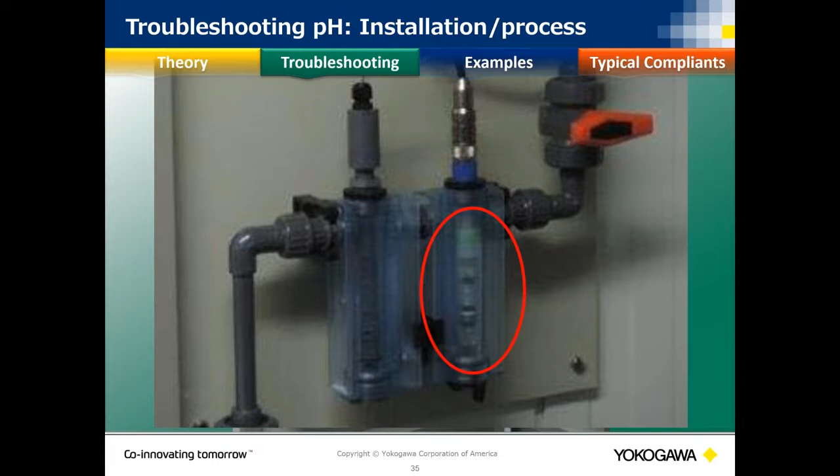So be sure you plumb it correctly, bottom to top. Another thing, if you don't know what these 12 millimeter glass electrodes look like—when the installer installed this flow fitting, they actually installed the pH electrode still inside its wet boot. This is very common. You're going to get pH readings that don't change with your process, because it's inside a standard KCl solution. So make sure we take off those fittings.

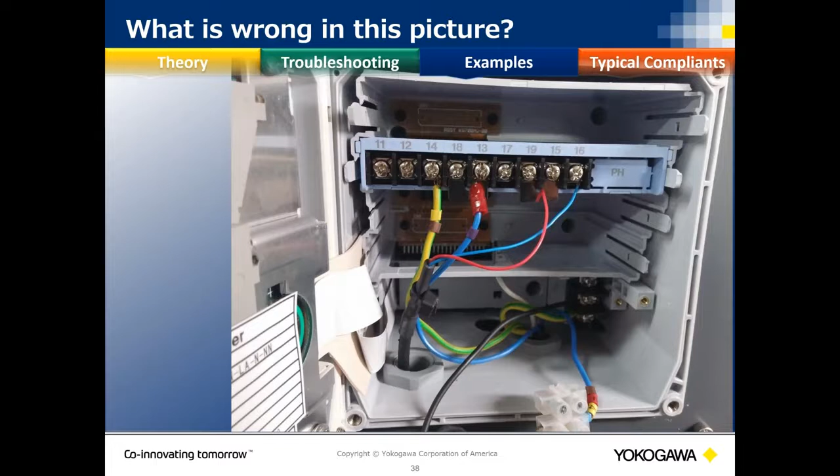We'll skim through these quickly. Water ingress—visually check for this. You'll get alarms if you don't turn them off before reaching this point, but you can visually see it; we call it wet feet. When we're mixing and matching cables and sensors, we need to make sure we don't damage the cable, and that we're using jumpers that aren't corroded. If we're using corroded jumpers, you're not getting good continuity, so you'll get errors in your reading. So basically look for those kinds of things.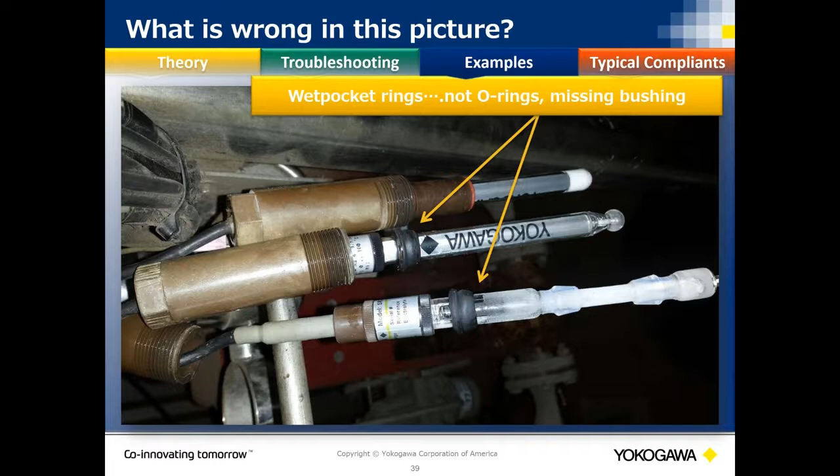Here's another picture of that, with our equipment. People were using the wet pocket incorrectly—the image on top shows you have an O-ring that's red and a spacer. When you put that in our holder, you get good continuity; it seals and everything pushes down on each other. What they did instead was use the rubber footing that goes on the wet pocket as the O-ring, and it didn't seal. It got ingress, went all the way up into the process, and got into the analyzer. So we just need to make sure we've got all the right O-rings.

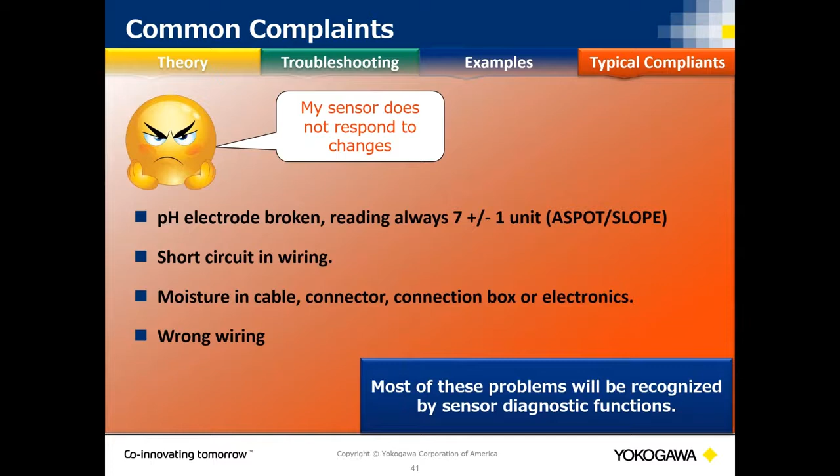Because it's a lot of information, and you can get into a lot of details when troubleshooting, I'll skim over it quickly. Basically, if your sensor's not responding to changes, we need to make sure visually that it's not broken, wiring's correct, and there's no moisture. Remember that diagnostic data - I'm going to ask you for that. We can read and interpret it to quickly figure out what's wrong with our system.

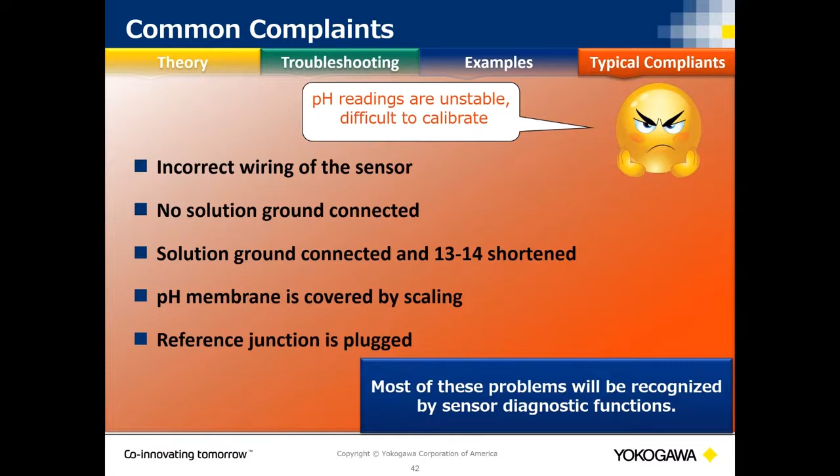The other most common complaint is it's unstable, difficult to calibrate. Incorrect wiring, no solution ground. Remember, if you don't have good grounding, you get noise that goes all the way up into the pH measurement, causing unstable readings. So we can jumper the reference and solution ground together, and that will lock in and give you a stable reading. If you don't want any alarms, you can leave it like that, but it's not ideal - just make sure you ground the whole system. And then scaling - leave those alarms turned on in the analyzers for you guys.

So that is the high level of what I have without going in too much detail. To open it for questions and answers - I think that's right at almost 40 minutes. Went over a little bit, sorry guys.

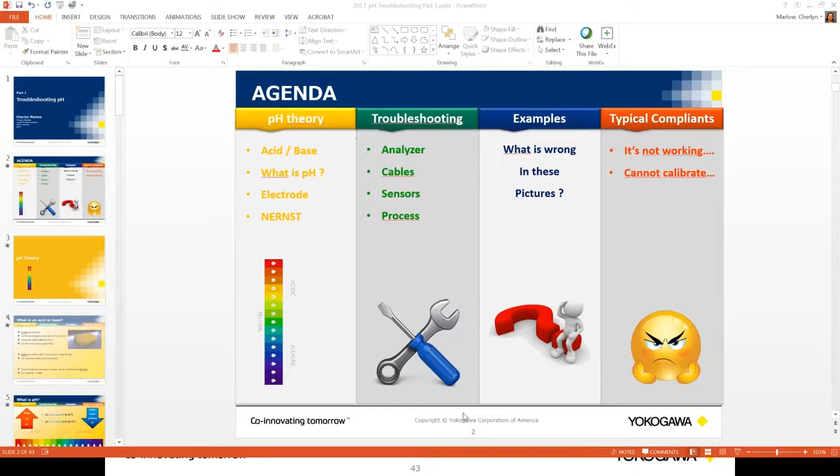And then if we have questions, and obviously anytime other questions come up, we can always give more details too.

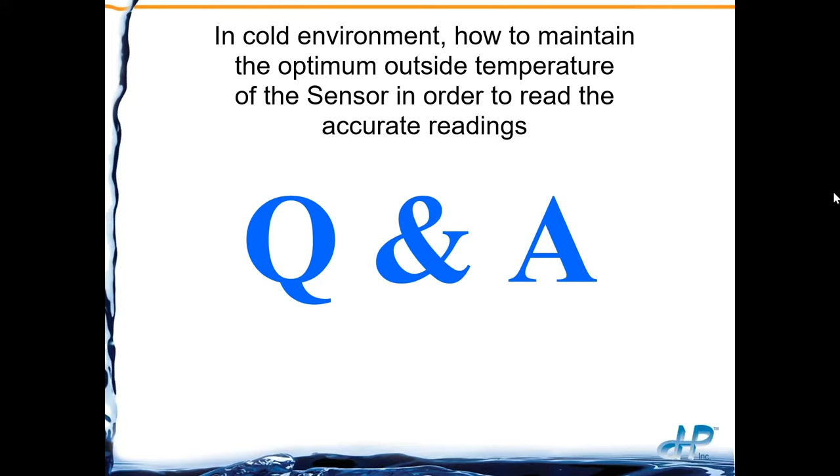Okay, the question is: when should we use a jumper? So pH systems have two portions - there's a reference, which is considered a low impedance system like an electrode, and then you have the measuring glass, which is a high impedance. Normally the jumper, when you're wiring it initially in an analyzer - most analyzers have the ability to do either dual sensors with dual high impedance, or a low and a high. So we'll have you put the jumper in for your reference to tell the analyzer, hey, that's a low impedance.

The other time this could be asking when do you use the jumper, is if you need to terminate to figure out if grounding is your issue. If you have a noisy reading and want to quickly check if grounding is causing your errors, you can terminate with a jumper your reference, your terminal, and your solution ground. If your pH measurement settles after that, that's an indication grounding is your issue. But like I said, it's not recommended - you can leave it there, but it's not good practice. It's better to solve the grounding issue.

So next question is, when reference gel is compromised, can the gel be replaced and work properly again? It depends on what type. If it's gel filled, most of these are not refillable, but some probes are rebuildable, as they call it, where you can physically pull out the reference portion and put a new one in. So depending on your system, you may or may not be able to do that.

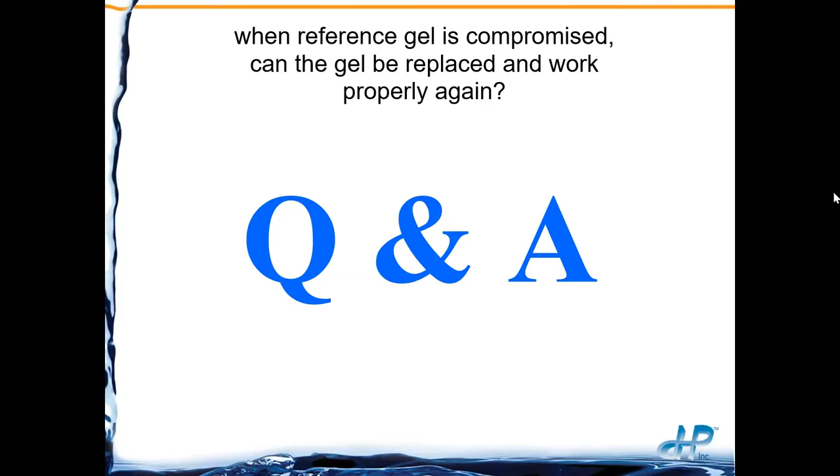All right, next question is it possible to use a pH sensor for ORP? Yes and no, depending on the sensor that you have. If you have a sensor that has the capability, meaning most of the time they'll use a solution ground, the temperature element in the wide body sensors has a platinum pin that they're using to do the temperature and the solution ground. Because it's platinum, a noble metal, you can do pH and ORP out of the same probe. But some wide body sensors use titanium, and that's not good practice because it's not a noble metal, so you can't get an accurate ORP measurement. So it is possible.

Okay, if you have a pH and ORP sensor in line, do you only solution ground one probe, or do both probes need that solution reference ran back to the controller? Two different types of answers here. One is if it's a combination where the solution ground rod is your ORP, then in the instrument, the analyzer, it's terminated at your solution ground, and it's acting as both your ORP and your solution ground. You've just changed the electronics to say this is reading pH and ORP, and in the background it does it all for you. Okay, if you have two independent setups where one is pH, yes, you have to have solution ground. And if you have one for ORP, it is good practice to have a solution ground with your ORP as well. Because remember, with your ORP, you're using that standard KCL reference, so any ground loop issues are going to go right through that reference probe as well. So I hope that answers it.

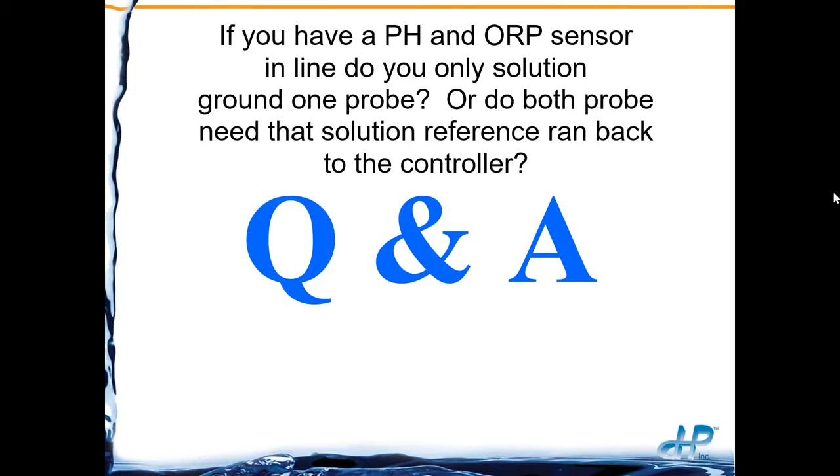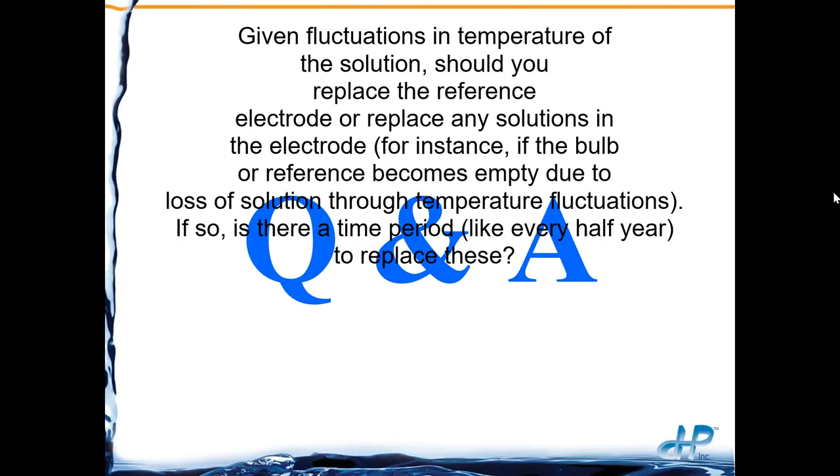Okay. If you have temperature fluctuations and your electrode is being depleted of KCL, you actually want to look at using a completely different reference system than what you're using. That's going to be the best practice and give you the longest life. They have systems, commonly called flowing reference, that have a port open to the process, attached to some external reservoir tank that has overhead pressure you maintain at 10 psi over your process pressure, so that KCL is always flowing out of the sensor so the process doesn't come in and suction it out. So if we are getting emptying of our sensor, and it's frequent, like every 3 months or even shorter, then absolutely you don't have the right reference for what the process conditions are.

Alrighty, and it looks like that was the last question. So I'll turn this back over to you, David. I hope you guys got a little bit of information. Like I said, it's hard to do pH troubleshooting in a quick hour because there's so many different variables. So we're always here for questions if you need help.